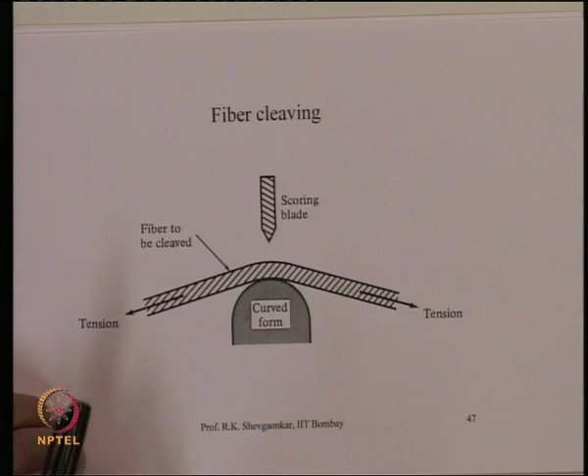After this, the fiber tip also has to be polished. There are certain polishing cards on which the tip of the optical fiber is very gently rubbed, so that the surface becomes reasonably flat.

This process is what is called the cleaving of the optical fiber. Once the fiber is cleaved, then invariably you have to join the fiber, and that process is called the splicing process. There are various types of splicing which could take place.

One could be a very temporary splicing, meaning I have two fibers which I just temporarily want to connect, and frequently should be able to disconnect also. This can be done either by using connectors to connect or disconnect the two fibers, or by inserting two fibers into some kind of rubber tube, where the fibers get aligned and touch each other, so that light can be guided from one fiber to another.

So there is a possibility that without actually making a permanent joint, one can couple light from one fiber to another fiber. Of course, since you do not have any permanent joint, there is a large loss in this kind of joint.

Normally, if you want a good efficient launching of the fiber, and the joint need not be of a temporary nature, then we go for what is called fusion splicing. The idea is that you take two fibers whose tips are cleaved, so you have reasonably flat tips, bring them close to each other, and this process of joining by fusion is identical to the soldering process in electrical circuits.

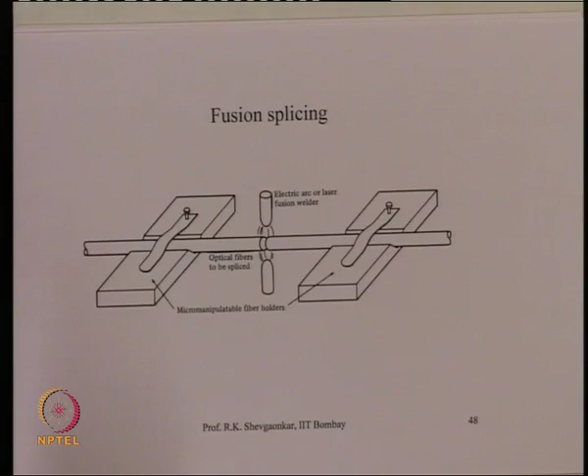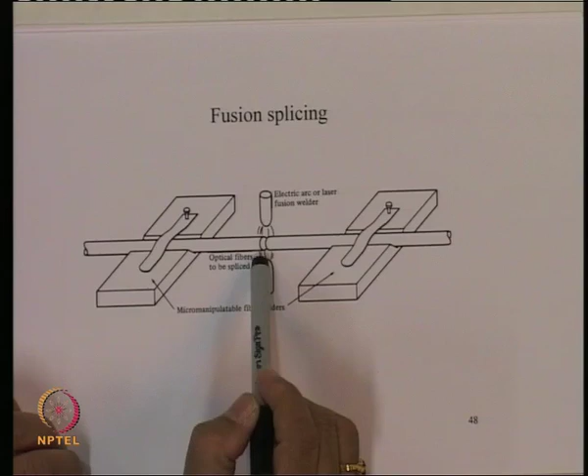In electrical circuits, if you want to join two wires, you bring them together, put a solder, and make a permanent joint at the tip of the wire. The same thing is done here: the two fibers are aligned perfectly, and an arc is passed at the joint so that momentarily the glass melts, and at that point if you give a small push to the fiber, the two semi-molten glass tips fuse into each other and you get a permanent joint.

So typically, whenever we want a permanent joint, fusion splicing is the one which is preferred.

You can also have joints which are UV cured, where the fiber ends are dipped into some kind of liquid, and if the liquid is exposed to UV light, it solidifies, giving a temporary kind of joint at the tip of the fiber. But fusion splicing is the one predominantly used whenever we have the network laid for long distance communication.

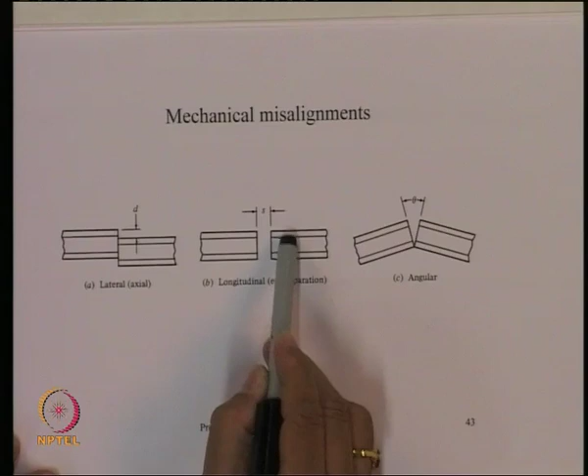When we join two fibers, there is a possibility of mechanical misalignment between them. Either the fiber could be laterally misaligned, meaning the axes of the two tips may not align and may be slightly displaced. Another possibility is that a small air gap remains between the two tips of the fiber, which is more common in a temporary joint made with a tubular rubber pipe. A third possibility is a small angular misalignment between the two fibers. Each of these essentially gives you a joint loss.

In the case of lateral misalignment, since the cores are not overlapping, the entire energy coming from this core is not guided into the second core. So you get a loss here.

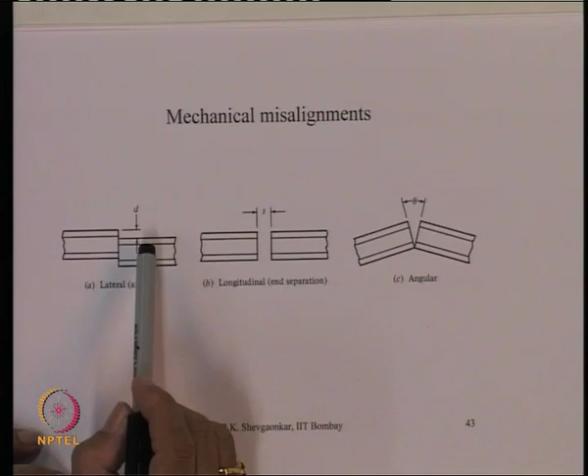Here you have a small air gap, so the numerical aperture cone which comes out does not completely overlap with the second fiber. Part of the energy leaks out from here, and we get a loss.

In the angular misalignment case, the numerical aperture cone goes in one direction while the receiving fiber's cone is in another. So you get a loss if there is an angular misalignment between the two fibers.

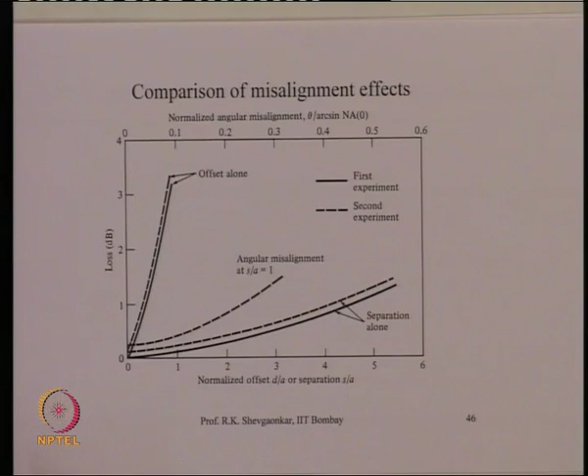So in a practical system, whenever we try to make a joint, we can get loss due to any of these three things. Here is a comparison of misalignment effects: we have the loss in dB as a function of normalized offset, or the separation between the two tips of the fiber.

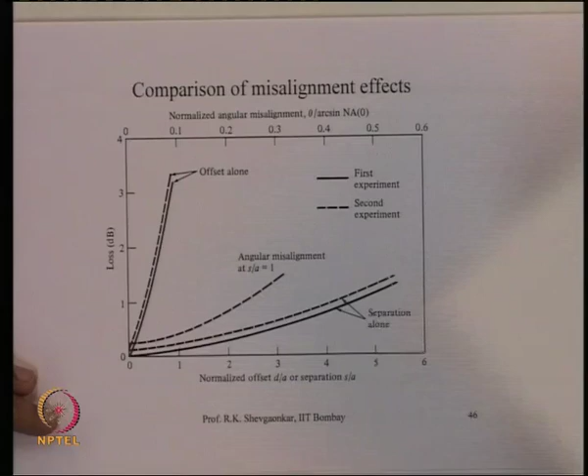This is normalized with respect to the core radius. You can see that if the two fibers are laterally misaligned by the core radius, there is a substantial loss of power, and if the two cores are not overlapping at all, meaning a misalignment by 2a, then no power will get inside the second fiber. This loss increases very rapidly with the misalignment parameter.

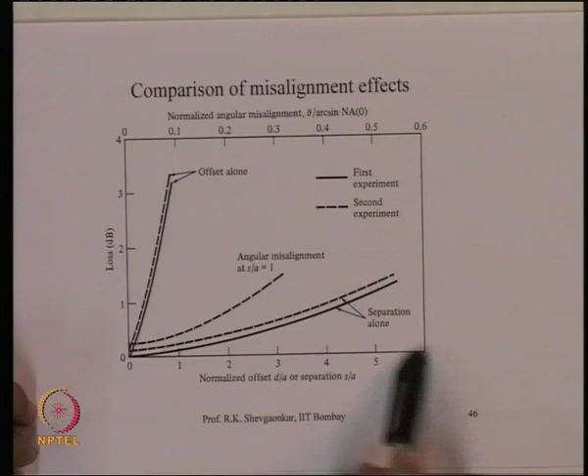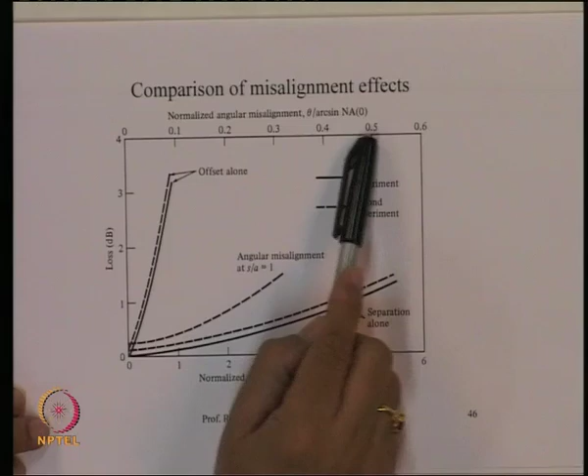This shows the loss in dB as a function of the misalignment. By the time you get a misalignment of 1, that is a misplacement of 1 radius, the loss will be of the order of 3 to 4 dB. The angular misalignment loss is a rather milder loss, where even a substantial misalignment in terms of theta, normalized to the numerical aperture, causes less impact.

The third type, separation, also gives you a loss, but this is the mildest possible loss. Even with a separation of about 3 to 4 radii of the core, the loss could still be of the order of about 1 dB.

But in any good system, these losses are normally minimized. Whenever we do a splicing, the fiber is aligned perfectly in all respects, minimizing the separation loss, the angular misalignment loss, and the air gap loss. A typical splice loss could be of the order of about 0.5 dB to 0.1 dB. Technology today has matured in splicing optical fibers, and as a result you get very good performance at the joint with loss as low as 0.05 dB.

Splicing machines have also become automated now, so one does not have to worry too much. Simply two fibers are inserted inside the splicing machine, and the machine automatically performs the alignment by launching light from one fiber to another, adjusting the parameters with 6 degrees of freedom so that the coupled light is maximum. At that instant, the arc is passed and fusion splicing takes place. This technology is now a pretty mature technology.

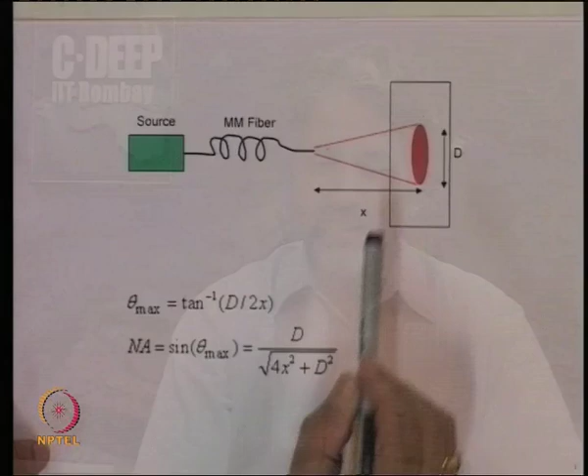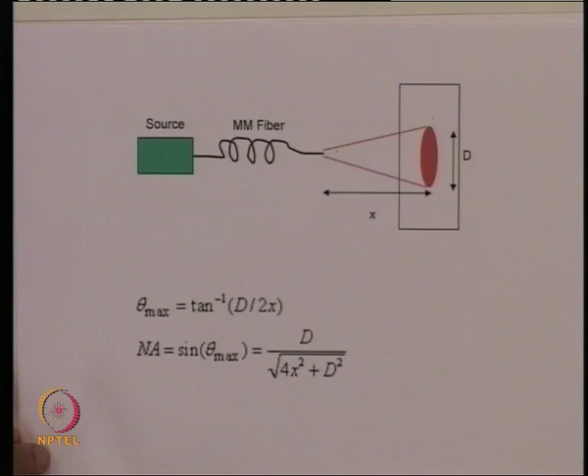So if this diameter is d and if this distance is x, then d upon 2x tan inverse is the maximum angle at which the light rays could be launched inside the optical fiber. Sine of this quantity theta max essentially gives you the numerical aperture. So numerical aperture is equal to sine of theta max, and theta max is tan inverse of d upon 2x. Substituting into this, we get the numerical aperture, which is d upon square root of 4x square plus d square.

So by measuring the diameter of the spot which is created by the emerging light from a distance x from the tip of the fiber, one can calculate the numerical aperture of the optical fiber. This is a simple experiment which one can conduct, and since we are measuring spot size, one can use a visible light source. Typically a red light source of helium neon laser can be used, and the numerical aperture of the optical fiber can be measured.

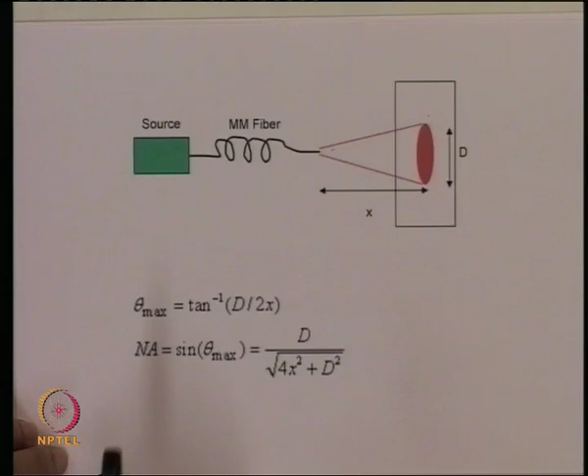So this is one of the first parameters which one can get. One can also get from this experiment what is called the mode field diameter. If you had a single mode optical fiber, instead of just measuring the spot size, if you have optical sensors which could measure the intensity distribution, we can move that probe on the screen and find out the variation of light intensity as a function of radial distance in the spot. So we can create the distribution which the single mode optical fiber creates, which is very close to Gaussian distribution, and from there we get the parameter called the mode field diameter.

Now, since the mode field diameter is a function of wavelength, one can carry out the measurement at a certain wavelength and then appropriately scale the mode field diameter to the other wavelength approximately.

The third important parameter is the loss. Since the loss is because of two parts, one is intrinsic to the optical fiber and the other is in the system, normally before the fiber is commissioned, the loss in the optical fiber can be calculated. There are two techniques for calculating the loss: one is a destructive technique, which can be employed only before the fiber is commissioned into the system. The other technique is non-destructive, which can be used even after the fiber is commissioned, and also during the operation of the fiber, this equipment can keep monitoring the status of the optical fiber.

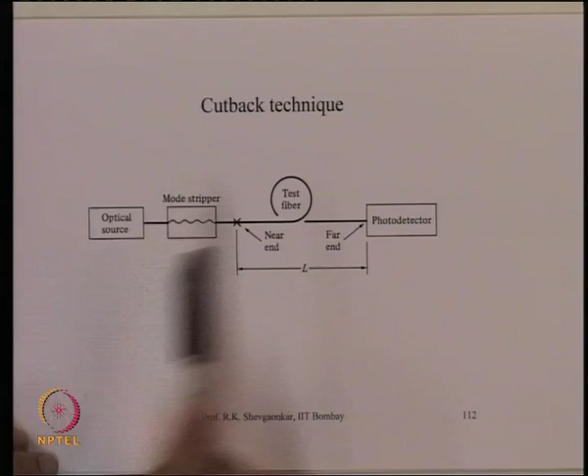So the first method, which is destructive and can be employed before the commissioning of the optical fiber, is called the cut-back technique. The idea here is simple. Firstly, you have an optical source here. You put the light inside the optical fiber, you measure what the output is, and from there you can find out what the corresponding loss would be.

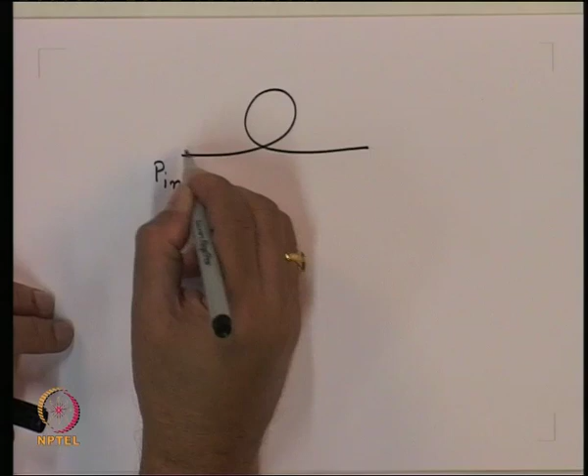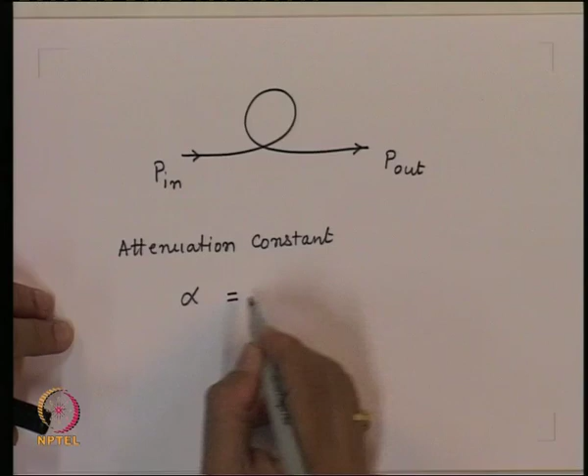So if I know the power which is put inside the optical fiber, and the power which is coming out of the optical fiber, the ratio of these two powers will give me the attenuation. So if this is my fiber, I put a power here which is P in, I get a power here which is P out. So I can get the attenuation constant alpha, which is nothing but 10 log to the base 10 of P in by P out.

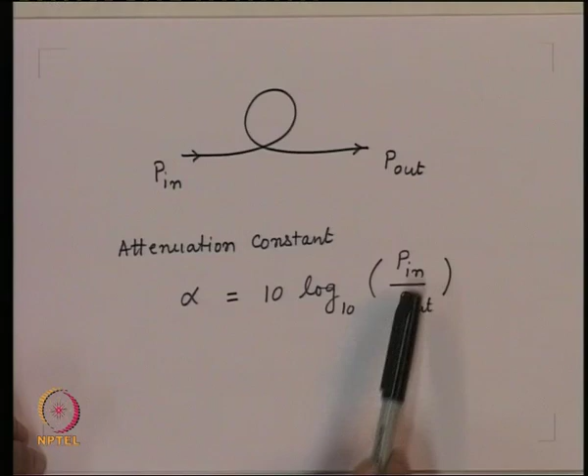Principally this method is very simple. Essentially, we measure the light going inside the optical fiber and the light coming out of the optical fiber, and just by taking the ratio of that and the log, you get the attenuation in dB for the optical fiber for that length. If you want the attenuation constant in dB per kilometer, you can divide by the length of the fiber, L in kilometers, so you get the loss of the fiber in dB per kilometer.

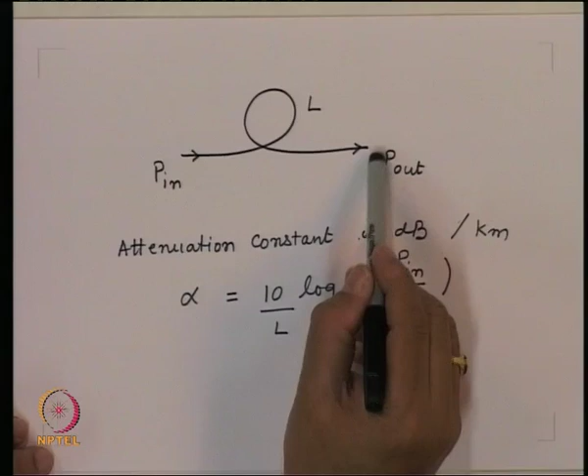Though principally this technique is very simple, in practice there are certain difficulties. Normally when light is launched inside the optical fiber, at the launching point there are substantial losses because of scattering of light. So though the output quantity can be reliably measured, the light which gets inside the optical fiber is not a very reliable parameter, because even if I know the source of light and how much power is coming from the source, how much light actually gets inside the optical fiber is still uncertain because of coupling losses. So although in principle this looks very simple, you cannot really use this technique in this form because that quantity is very unreliable.

So normally what we do is use the cut-back technique. You take a very long length of optical fiber L, launch the light inside it, and there is a device called the mode stripper, because when light is launched inside the optical fiber at the launching point, a large number of modes are generated which very quickly die down, leaving finally the modes which are well confined to the optical fiber and which propagate. So you have a certain distance here which guarantees that.

Now you measure the light output after the light has passed through this fiber; that is the quantity P out. Then you simply cut the fiber over a distance of about 10 meters or so, and measure again the light coming out at this point, which is called the near end of the optical fiber. If this length is typically of the order of a kilometer, the loss of the fiber over a distance of a few tens of meters is negligibly small. So we can say that whatever light comes out from the near end of the fiber after it is cut is the same as the P in for this fiber.

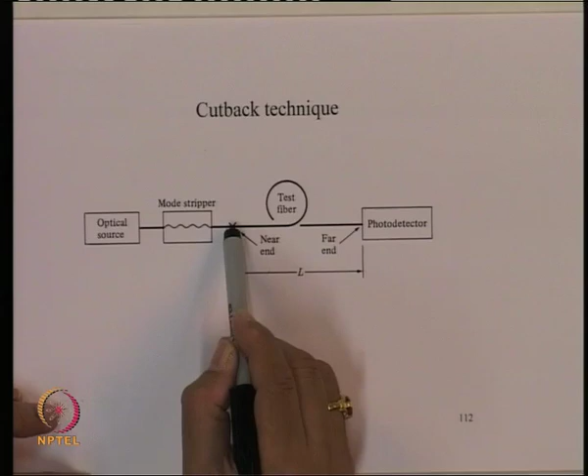So we do the measurement of light coming out only. In the first case, with the full length of the fiber present, you get P out. Then you cut the fiber near the near end, and that output is essentially P in. Then taking the ratio of these two, you can use the formula to get the attenuation constant of the optical fiber.

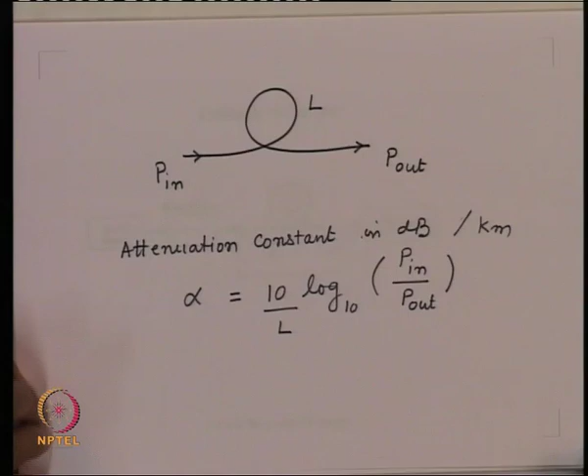So before the supplier gives you the optical fiber, this method can be employed, because as is clear, you have to cut the fiber. So this method cannot be employed after the fiber is commissioned into the system. Otherwise, this is a reasonably accurate method if you can afford to cut the fiber, and that can happen only before installation of the optical fiber.

The very powerful technique which can be employed to estimate the loss of optical fiber before and after commissioning is called the optical time domain reflectometer. So what we have here is a device called the optical time domain reflectometer, which is nothing but an optical radar.

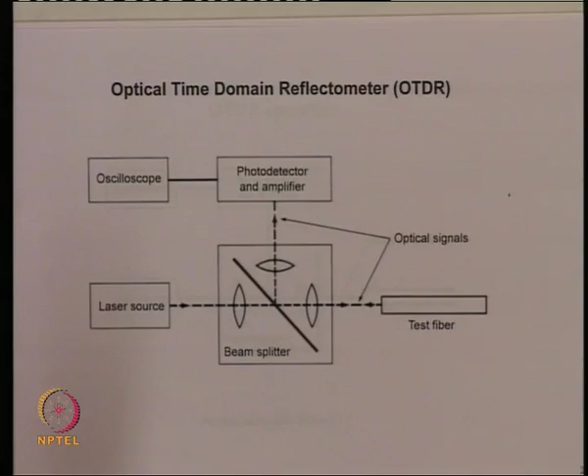So recall what we do in radar: we essentially send a very narrow pulse of radio wave. The pulse goes, gets reflected or scattered from the object, and we receive the echo of the pulse back. From the echo we get two parameters: one is the delay of the echo, meaning the return time of the signal, and the second is the amplitude of the echo, which tells us from what size object the signal has reflected. So from these two parameters we estimate the size of the object and its distance.

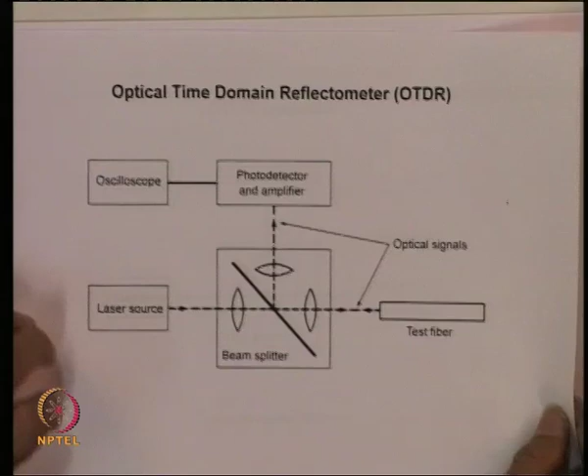Precisely the same thing essentially we do in this device, what is called the optical time domain reflectometer, or in short called OTDR. So, this OTDR has basically components like this.

It has a laser source which launches the light. Then you are having a beam splitter, so the light passes through this. This goes inside the fiber which is to be tested. The other end of the fiber is not needed now. So light which goes inside the optical fiber, because of the scattering or reflections at various points, the light gets reflected, it comes back. The return light is diverted through this beam splitter in this direction.

You detect that light and plot that on the oscilloscope as a function of time. So, if you launch a very narrow pulse of light, what you will see is that we do not have only one echo which will be coming from here. The echo will come from different points. So, some energy may get reflected from here, some may get from here, some may get from here.

So, what we see is that the signal which is getting reflected from various points will arrive at different times. So, it will have a different location on the oscilloscope screen. So, for a very narrow input pulse given from here, you will get a signal which is much spread in time. That is what will appear on the oscilloscope.

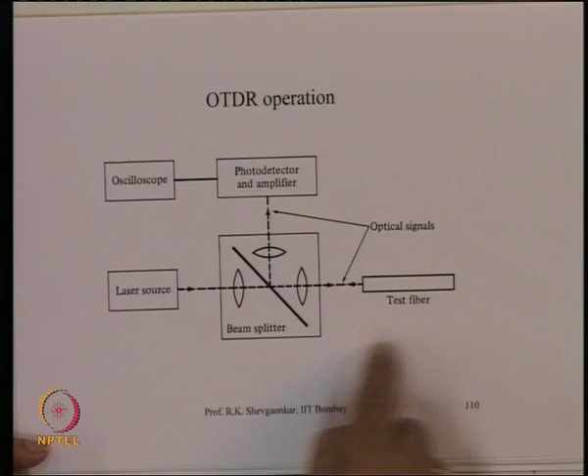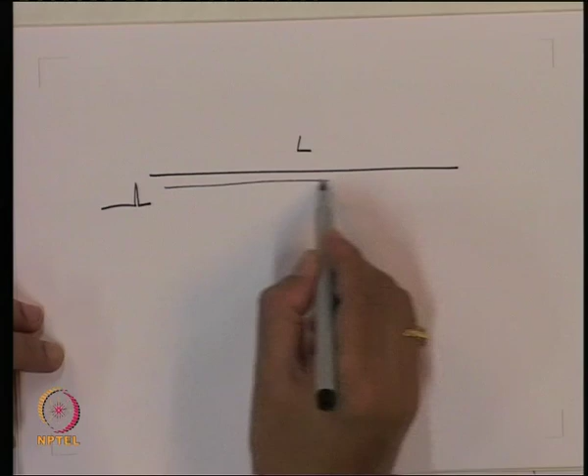So, the maximum time separation or spread which you will get would correspond to the maximum return time which you can get on the optical fiber. So note here, if I had an optical fiber of length L, a pulse is launched from this. The pulse will go all the way up to this point and come back. So it travels a distance of 2L.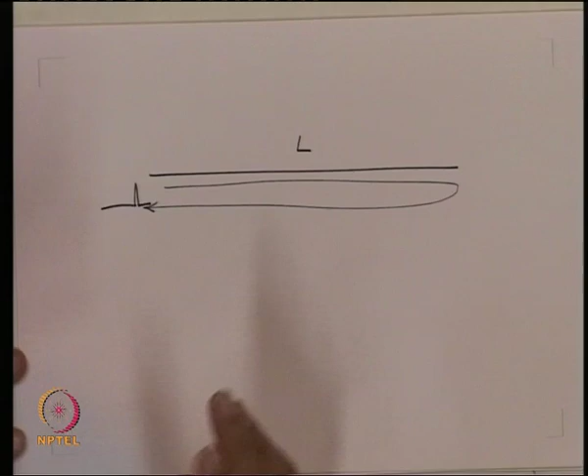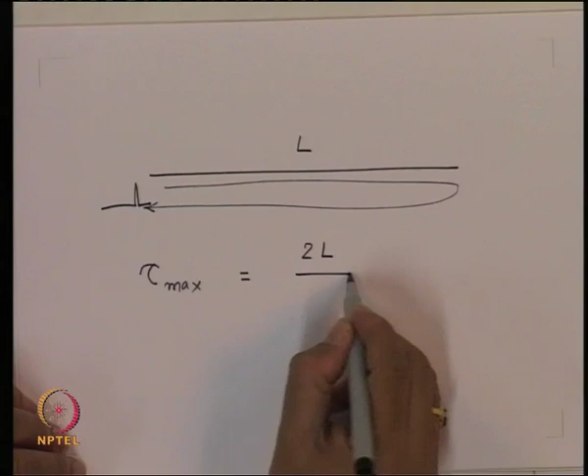And if the velocity of the light inside the fiber is c divided by N, where N is the refractive index, or we can call N effective if we are having a fiber which has refractive index N1 and N2 for the core and cladding, then the maximum delay which you get from here, that will be equal to this 2L divided by the velocity, which is c by N effective.

So, for a very narrow pulse launched inside the optical fiber, we get a reflection which has a time spread of tau max. So typically that is the spread over which the signal will come, from 0 to tau max.

Now, one can ask a question: when the signal goes inside the optical fiber, why do I get a reflection? And you will recall that inside an optical fiber we had these micro centers which were giving you the scattering loss. We can now rely on those losses, and as we know that scattering loss is because of the scattering of light which takes place in all directions.

So, as the light goes inside the optical fiber, a very tiny fraction of that light gets scattered in all directions. So part of that light essentially will travel backwards inside the optical fiber. That is the light essentially we are trying to capture.

So now the pulse, when it goes into this, for a nice uniform fiber, the scattering loss or scattering mechanism is identical at every location on the fiber. However, if you ask how much will be the scattered power, you will see the scattered power will be proportional to the local power density at that point.

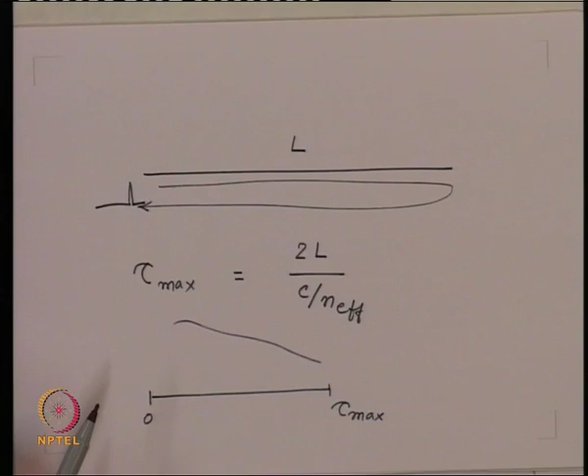And that's the reason you see that in this time spread, you do not get a scattered amplitude which is constant. The scattered amplitude essentially monotonically decreases if you are having a nice uniform fiber, because at the near end you get a much stronger reflection, and at the farther end essentially the reflection is very small. So if you take this trace of the oscilloscope, the typical trace would essentially look like that.

So, oscilloscope display, or what you call OTDR display, essentially would look like that.

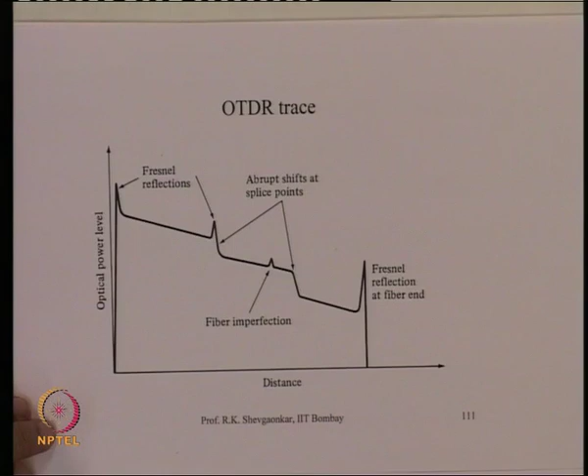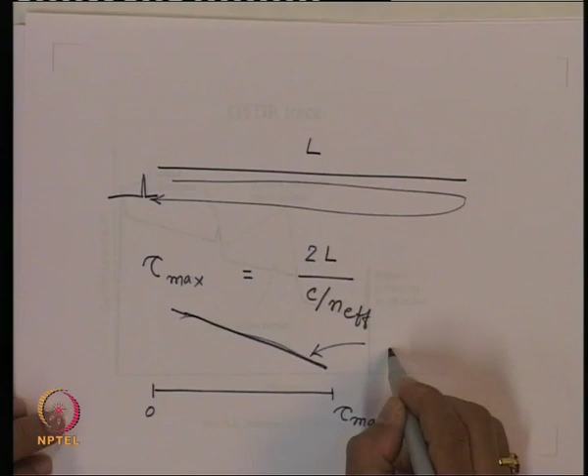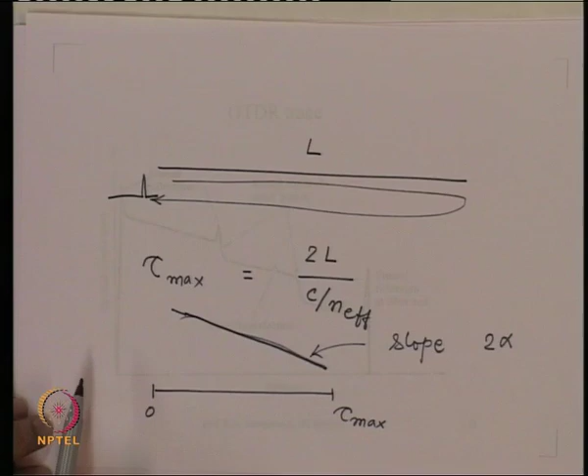If we had a fiber which is absolutely uniform, then we will get a trace which will be a straight line, if we plot this in terms of the logarithm, in terms of dBs, because dB per kilometer will be constant. The slope of this line essentially will be equal to 2 times alpha, because the signal is attenuated and the scattered light is further attenuated. So, just by measuring the slope of this trace, one can calculate the attenuation constant of the optical fiber.

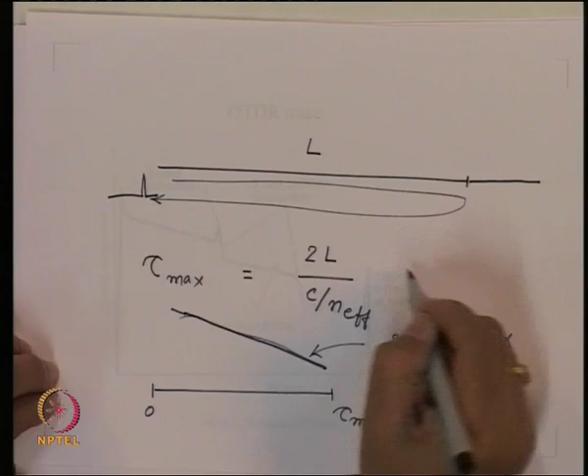But now let us say that the fiber is not absolutely uniform. Let us say the fiber had a joint here, and I had another fiber here. So, at this point there is a junction, maybe there is one more junction here, or there is a connector here. Whenever we have a junction like a splice or a connector, you have partial reflection of the light from that point, not Rayleigh scattering. This is what is called Fresnel reflection, which takes place from these joints.

So, you will see suddenly at this point the signal which is getting reflected has a large amplitude, because suddenly more amount of light is reflected. But beyond this point, since now the light amplitude is reduced because more light is reflected, the signal level of the scattered light will drop compared to what it was here. So, typically you would see a trace on the OTDR which will look like this.

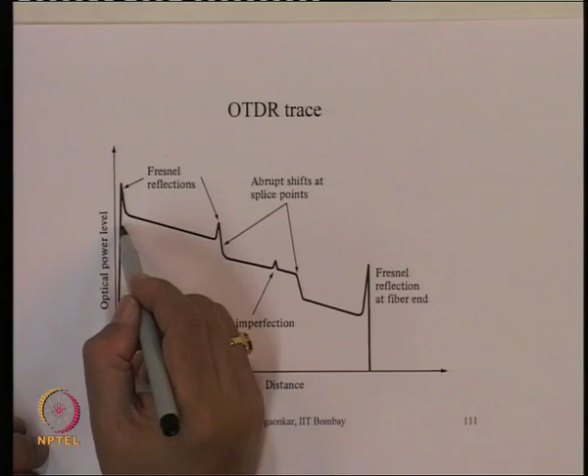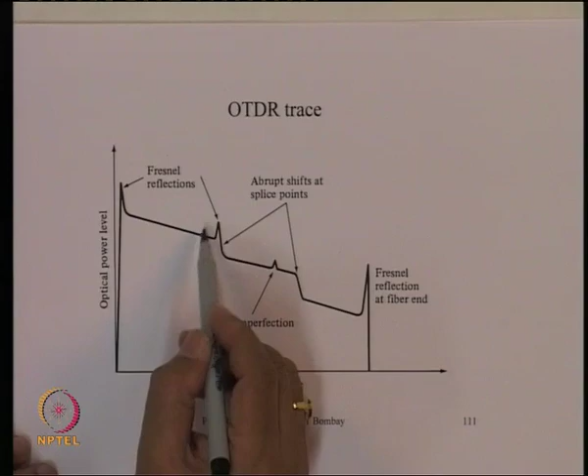So, firstly, at a very short distance you will see a very strong peak, and this peak is because there is a reflection of the laser beam from the tip of the fiber where the light is getting launched inside the optical fiber. That is this peak. Then inside the fiber you get the scattered light, which has a slope equal to 2 alpha. At this location you again have some joint or something, so you have a Fresnel reflection, and as I mentioned, beyond that again it drops because now more light is lost in this process. And like that you can have some small imperfections.

So a typical trace would essentially look like that, and these points where you see abrupt changes in your trace are the locations in the fiber where either there are connectors, or there are splices or joints, or there are some other imperfections inside the optical fiber. And at the far end of the fiber, since beyond that the fiber is not there, again you will see a strong reflection from the other end of the fiber, which is this reflection. So typically the trace of the OTDR would look like that.

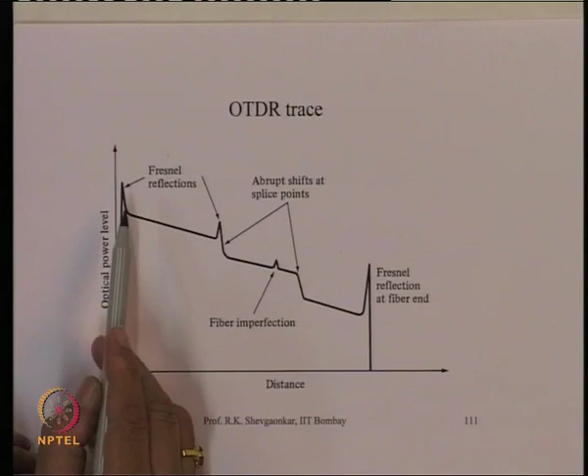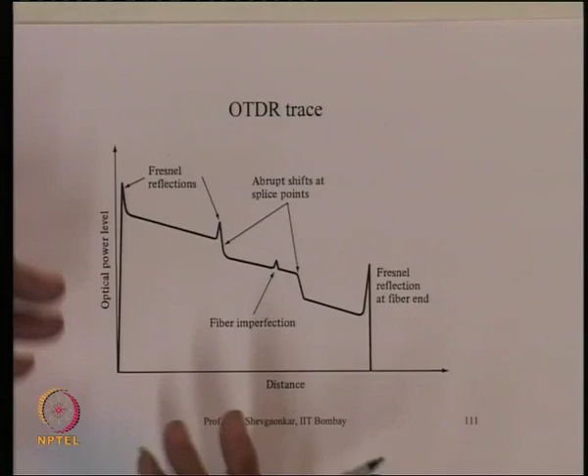So OTDR actually can tell you a lot of things. It tells you the attenuation constant of the fiber, which can be measured by the slope. It can also tell you where the imperfections in the fiber are, where the connectors are located inside the optical fiber, and so on. So OTDR is an extremely powerful technique for measuring the losses on the optical fiber.

And not only losses, it is also possible to essentially monitor the status of the optical fiber. Now, since this method requires access to the optical fiber only at the input, we do not have to have access to the far end of the optical fiber. This measurement can be carried out even after the fiber is commissioned, and precisely that is what is done in practice. Periodically you connect an OTDR to the optical fiber, find the trace of the optical fiber, and it gives you perfectly the locations where the connectors are located.

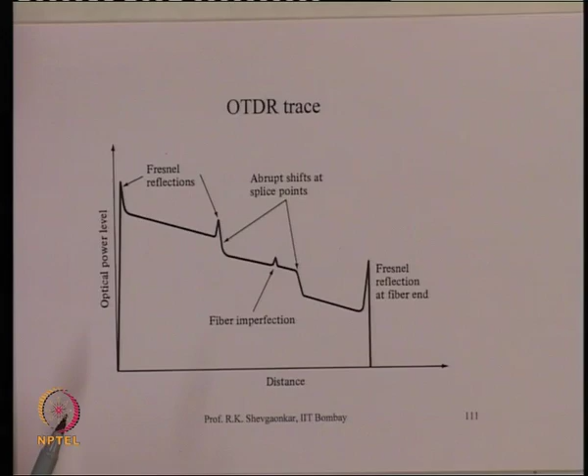But suppose you find suddenly an anomaly in your trace. Let us say suddenly at this location there was a sharp peak, which normally when you installed the fiber was not there. Then you can immediately come to know that somewhere tampering or something has taken place to the optical fiber. So OTDR not only helps in carrying out the measurement of the attenuation constant of the optical fiber, but it also helps you in monitoring the status of the optical fiber during the operation of the optical communication link. And that is the reason this technique is an extremely powerful technique.

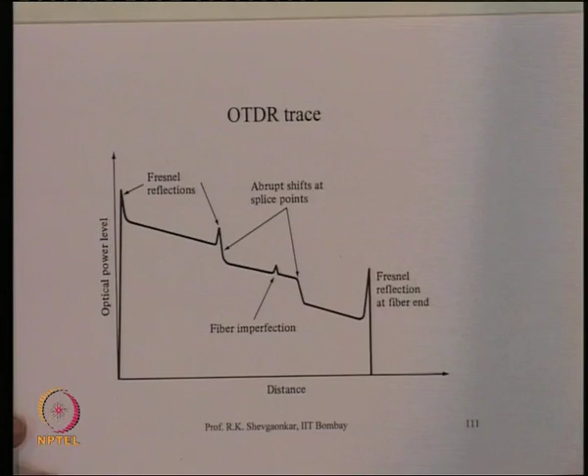Now, certain issues one can ask here. Firstly, to get a trace, ideally speaking, one light pulse is good enough. So if I just send one light pulse, you will get this reflected signal which will look like that. I got a trace, and that should give me all the information which I am looking for.

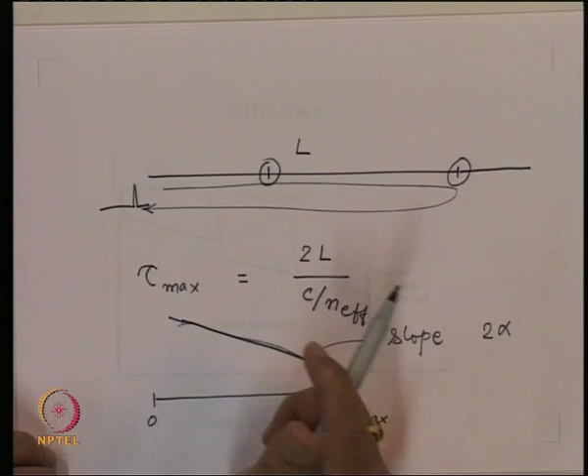However, note here that the light which we are measuring is extremely weak light because it is coming predominantly because of Rayleigh scattering. So for typical light which you can launch inside the optical fiber, if I want to have a substantial reflected signal, we should have two things happen.

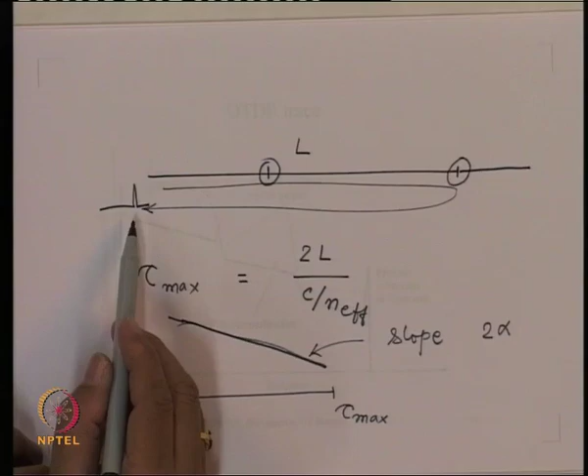First thing, the power in this pulse should be very large. That is one. Second thing, this pulse should be very narrow, because otherwise we will not be able to identify the faulty locations - the separation will depend upon the width of the pulse. Larger this width of the pulse, more will be the ambiguity in the distance of the two imperfections in the fiber. So to get what is called the higher resolution of the faults on the optical fiber, you have to make this pulse width extremely narrow.

But you want a certain amount of power for detection, because otherwise your signal will not be detected properly. So as a result, essentially you have to increase the peak power of this pulse, because the average power has to be maintained at a certain level. So ideally for an OTDR, we require reasonably high power, very narrow pulses, that means with very high peak power. This is what we normally do in other radars also. And these are the pulses which essentially go inside the fiber and get reflected.

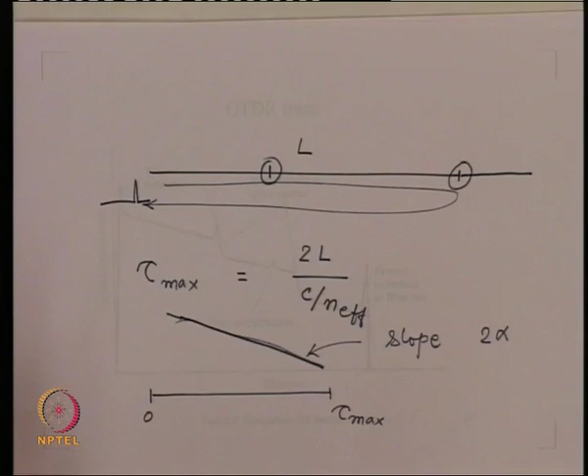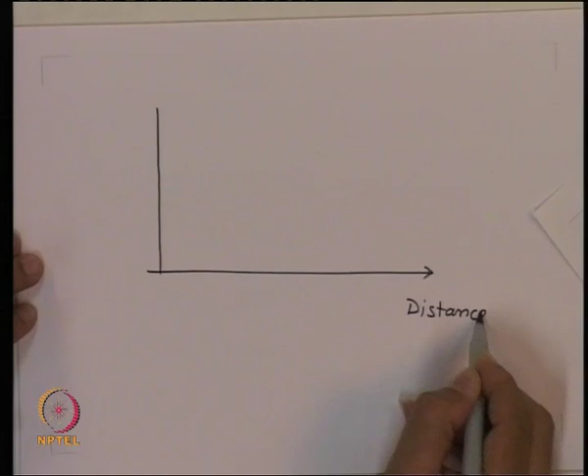But as I mentioned, even with that high power, the light which you can receive from one pulse is very, very small, and it gets completely submerged into the noise or statistical variation of the signal after detection. That is the reason just one pulse launching will not suffice in practice, because with one pulse you will not be able to get a trace like that. In fact, if you just transmit one pulse and take the signal and plot it as a function of distance, the signal will not have a trace like this, but will actually look something like that, something like this, because the signal is completely submerged into the noise.

So what we have to do is essentially transmit multiple pulses and go on averaging the signal which comes from various pulses, and then slowly the signal to noise ratio will improve, and then the trace of the OTDR will emerge. So you will get a trace slowly emerging from this, because the signal to noise ratio will improve after the integration. That is the reason we have to transmit multiple pulses on the optical fiber for measurement of the loss.

So two issues now come in. When you are launching the multiple pulses inside the fiber, what should be the minimum separation between these two pulses? Or in other words, what should be the pulse repetition frequency? And secondly, how narrow should be the pulse width for a given resolution on the optical fiber?

So firstly, you will note that for every pulse which is launched, the return signal or echo will be spread over a time which is tau max. That means if we had another pulse transmitted within this time, we will not know whether the received signal is because of the previous pulse or the next pulse. In other words, there has to be a minimum separation between the two pulses, which should be tau max, which essentially is given by this.

So if we have the maximum distance given to you, then you can get the repetition frequency for the pulses, which will be essentially 1 upon this tau max. So you can get the pulse repetition frequency PRF, that is equal to 1 upon tau max. Here L is the distance or the length of the fiber.

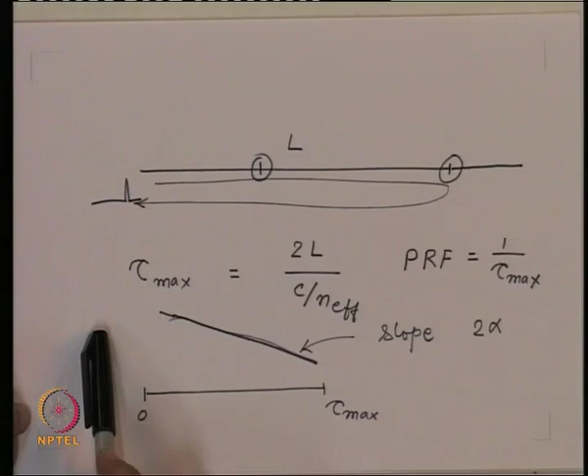So depending upon over what distance one would like to carry out the measurement on the fiber, one can decide the pulse repetition frequency. Typically, one can use this technique for a distance of about 50-60 kilometers. So you get a pulse repetition frequency which will be extremely small, typically of the order of about a few hundred cycles or a few hundred pulses a second. That is the kind of pulse repetition frequency you can get.

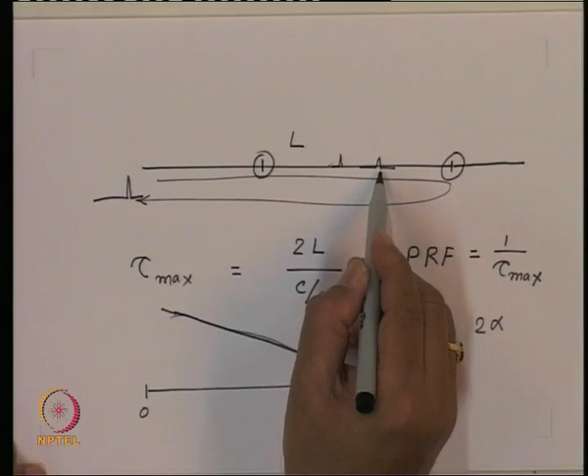Second thing we have now is the resolution. Suppose we had two faults on the optical fiber, something like this. The pulse energy will get scattered at this point and travel back, and pulse energy will also get scattered from the other point and travel back. The energy which comes back at a given instant, if I look at the pulse, will have a width exactly the same as the width of the launched pulse.

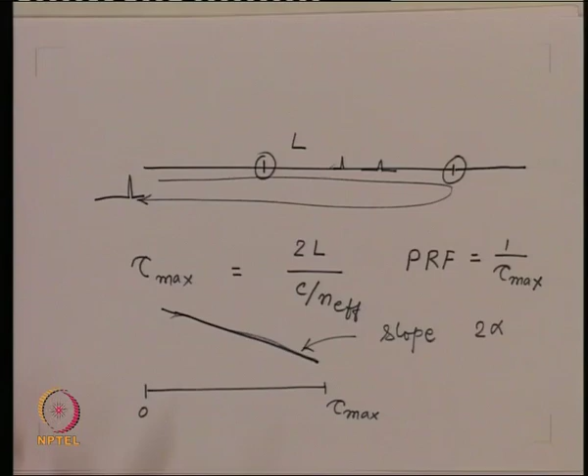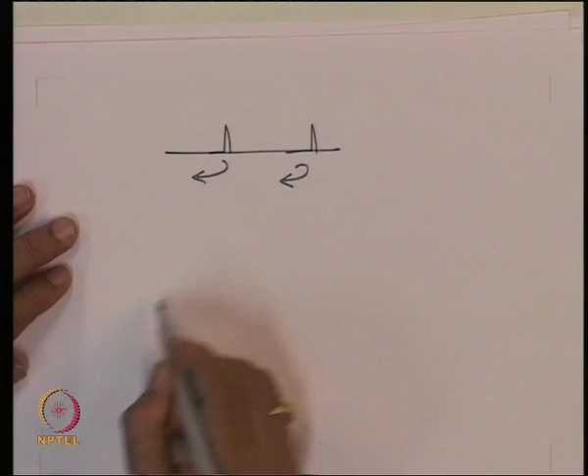So if we forget about scattering loss for the time being, suppose we had reflection coming from this point and this point. We will receive two reflected pulses of the original width, one from this location and one from this location. So for two events or two faults on the fiber, you get two reflected pulses, one from here and one from here, just separated in time.

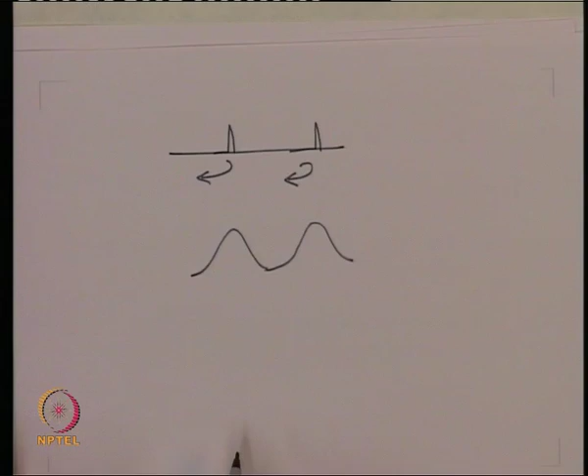Now, if the two faults are close to each other, these pulses will overlap. So we can define resolution as the minimum distance you should have between two faults on the optical fiber so that they can be identified as two faults. If the two faults are located within a distance smaller than that, they would appear as one fault.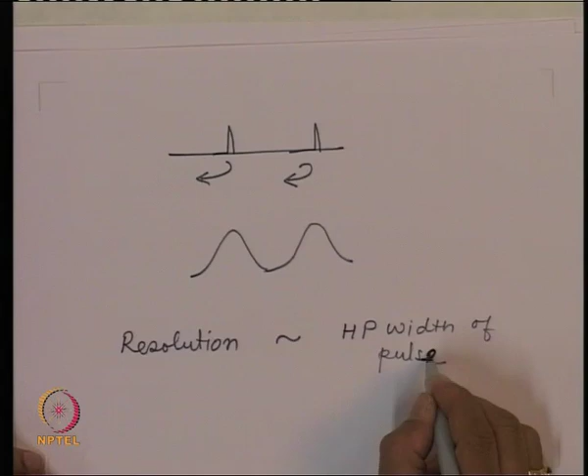So approximately, we can say that the resolution is approximately equal to the half power width of the pulse in time. This is the half power width of the pulse in time. So if the half power width is larger, you get a larger separation needed between the two. Ideally, we want the half power width of the pulse to be as narrow as possible.

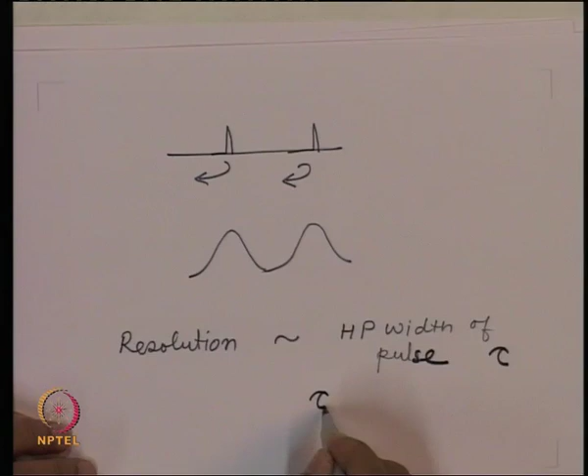This width can be converted into spatial distance. So you can say that if the pulse width was tau, then tau multiplied by C upon n effective gives you the spatial resolution.

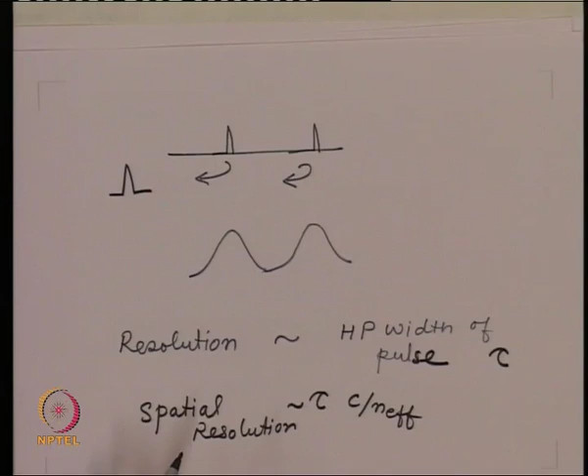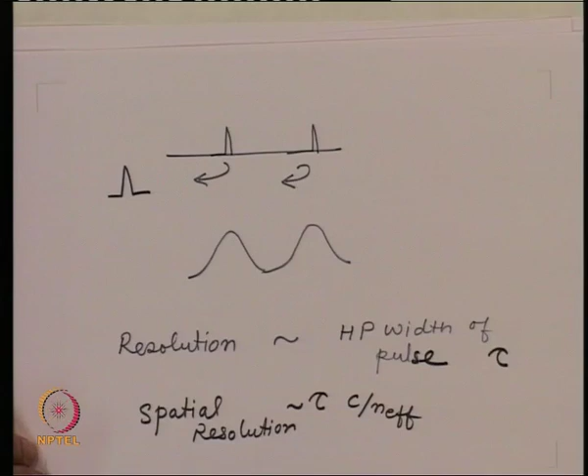Note, however, that the half power width of the pulse, because of the dispersion present on the optical fiber, is a function of distance on the fiber. Initially you launch a certain pulse inside the optical fiber with some value of tau, but as it propagates, because of dispersion, this pulse broadens. If the pulse was reflected from a nearby location, it would have a width almost the same as the transmitted pulse, whereas if reflected from a location far away or at the far end of the fiber, the pulse would be broadened because it travels a distance 2L on the optical fiber.

And since the resolution is related to the half power width of the pulse we receive, in other words, the resolution becomes a function of distance on the fiber. So faults which are close to the near end of the fiber will give a smaller, better resolution. Faults toward the far end of the optical fiber will have poorer resolution.

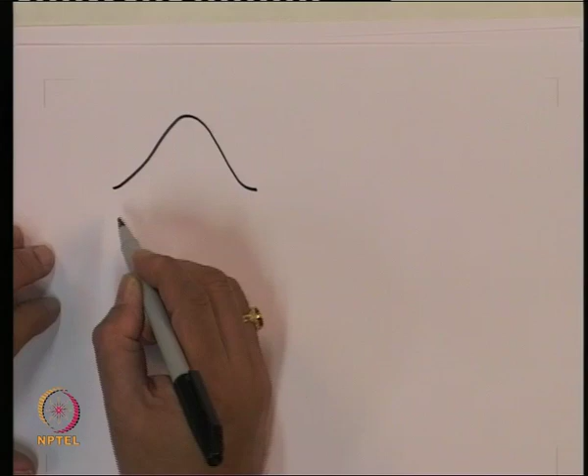So if we approximately say that the pulse launched inside the optical fiber is of Gaussian nature, and tau is essentially the standard deviation of that input pulse, and let us say the pulse broadening which takes place inside the fiber is also more or less Gaussian in nature, we can say initially you had a Gaussian pulse with a sigma equal to tau I. This is approximately a Gaussian pulse.

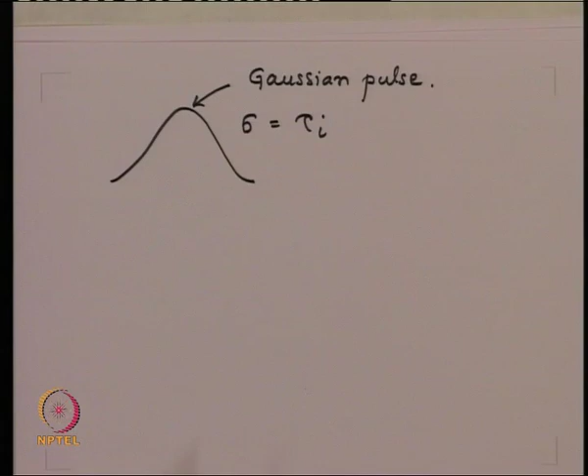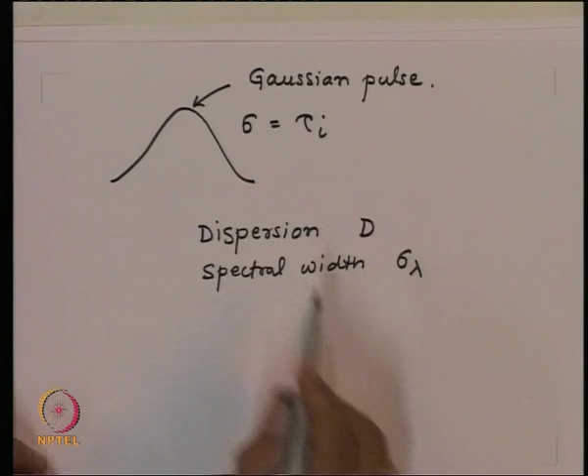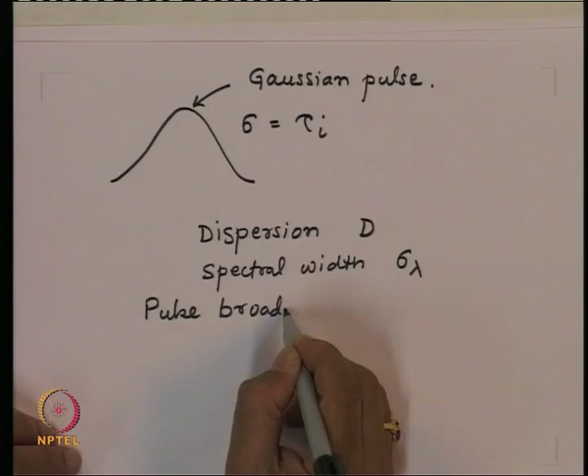Now, if I say that the broadening phenomenon because of dispersion is also Gaussian, and if the dispersion on the fiber is given by d, and the spectral width of the source is sigma lambda, and the length of the fiber is L, then the broadening function would be a Gaussian function with a standard deviation which is nothing but d into sigma lambda into L. So we have a pulse broadening function with variance equal to d into L into sigma lambda squared.

So when a Gaussian pulse is launched inside the optical fiber, it gets broadened because of this broadening function, which is a function of distance L. Since both of these functions are Gaussian, the reflected pulse received by the OTDR will simply be the convolution of two Gaussian pulses. So the output will again be Gaussian, with a variance which is the sum of the two variances.

So you can get now the pulse width for the reflected signal. Let us call it tau, that will be equal to the square root of the variance of the input, which is tau I squared, plus the variance of the broadening function, which is d into L into sigma lambda squared.

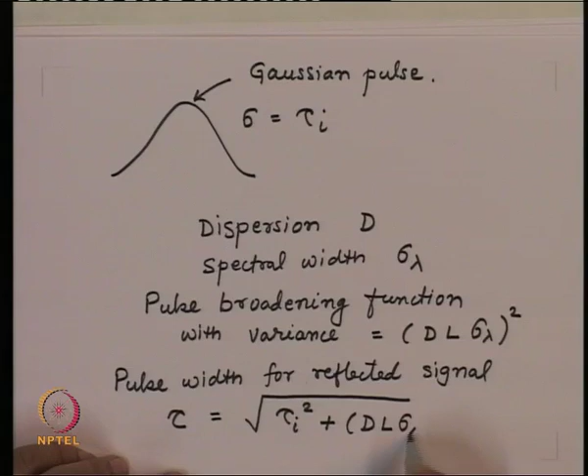That is precisely what we have: the resolution we get now corresponds to this pulse width. So when the length is small, such that this quantity is negligible compared to this width, you get a resolution decided by the input pulse. But if the distance is substantial, so that this quantity becomes negligible compared to this one, then the resolution essentially becomes proportional to this quantity L.

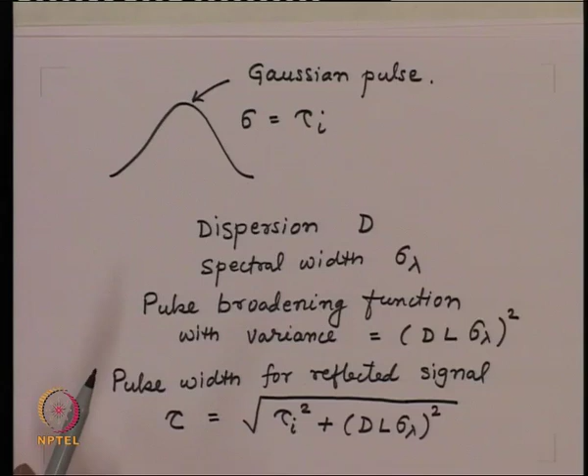So if we consider an OTDR and the long distances in the fiber, depending upon the dispersion parameter and the spectral width used for the OTDR source, we will get the resolution of the OTDR, which will become a function of the length of the fiber.

So now we find something interesting for the OTDR measurement. One, OTDR measurement is extremely powerful because it can be carried out even after the fiber is commissioned. In fact, with multi-channel transmission, one channel can be connected to the OTDR, maybe on a permanent basis, so that if anything goes wrong on the optical fiber, you immediately get an alert. So the OTDR technique can be employed to find the status of the optical fiber and for continuous monitoring of its loss performance.

The resolution you can get on the OTDR is decided by the pulse width you can launch, and typically a nanosecond kind of pulse is launched inside the optical fiber, but the resolution will be a function of distance on the optical fiber. So the faults towards the near end of the optical fiber have a much finer resolution compared to the faults towards the far end of the optical fiber.

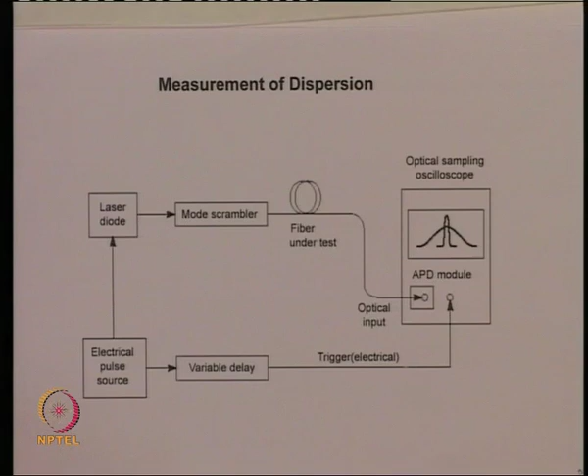Lastly, the parameter we want to measure is the dispersion on the optical fiber. The setup is as follows: essentially we have a laser diode, we launch a pulse of the signal inside this, and then we get the signal output, and then we simply measure the pulse broadening. So the idea here is simple.

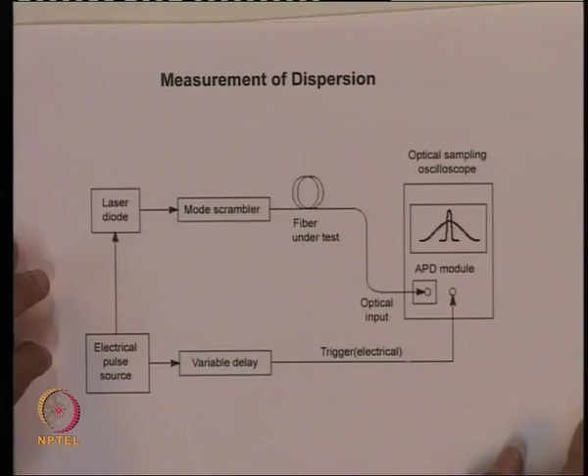By launching a very narrow pulse, you find out what the output pulse would be, and as we saw in the previous case, the output pulse would be a convolution of the input pulse and the dispersion broadening function. So if you have an estimate of the output pulse, and assume that the broadening function and the input pulse are both Gaussian in nature, then one can find the variance due to the dispersion broadening function. So using a setup similar to the previous one, we can also get an estimate of the dispersion on the optical fiber.

Many times what we do is let the signal pass back and forth in a short length of optical fiber to emulate a very long distance of optical fiber, so that you can get a large pulse broadening because of dispersion, and you can get the estimate of the dispersion from that.

So in this lecture, we have summarized some of the measurement techniques employed in practice for the optical fiber. First we saw the numerical aperture measurement, then we went to the loss measurement, and in this we saw two techniques, the cutback method and the OTDR method, and then by using similar setups we could get the measurement of dispersion also. So this concludes our discussion on optical fibers.